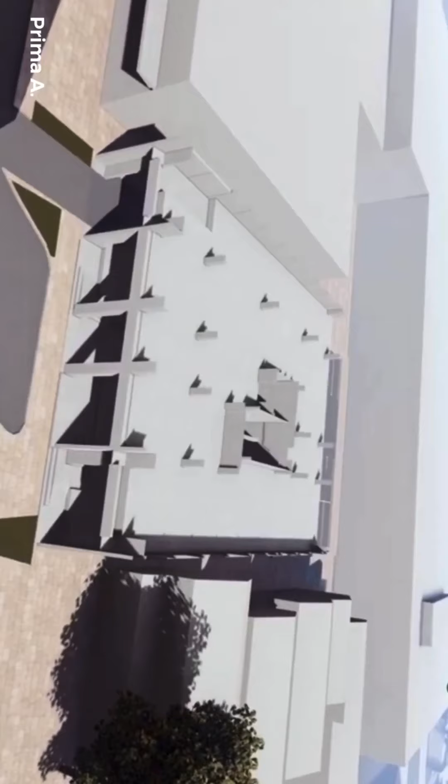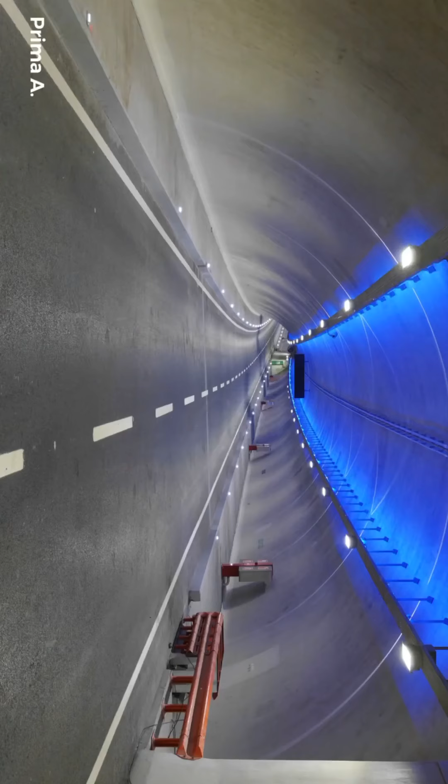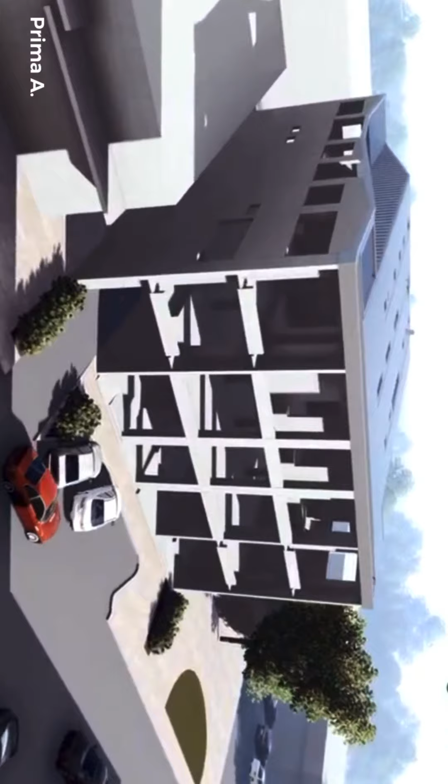Structural engineering is one branch of civil engineering that discusses the design structure and structure analysis of buildings. Structural engineering is also related to the development environment such as tunnels, offshores, bridges, flyovers, dams, towers, stadiums, and other civil engineering works. Further information, structural engineering theory is based on physical laws and empirical knowledge about the performance of structures based on certain materials and geometries.

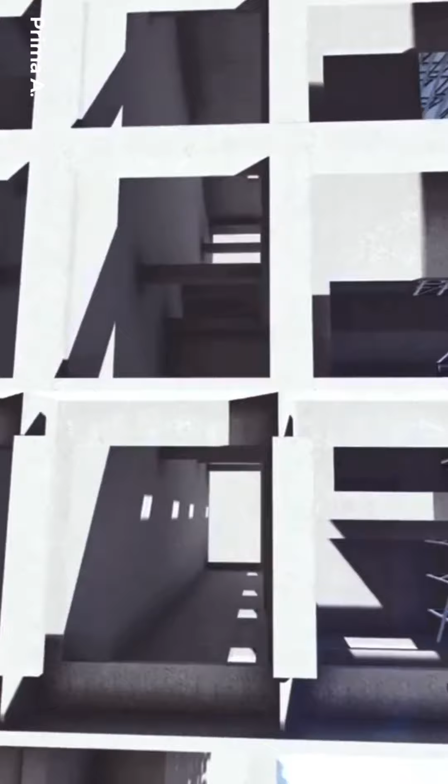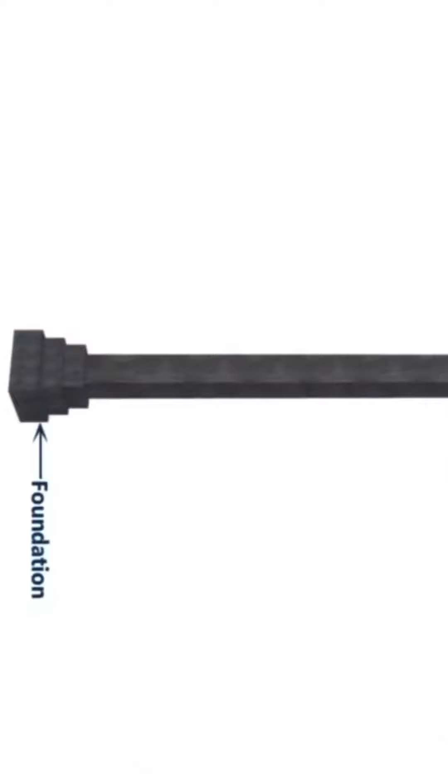Structure itself is defined as an interconnected system that is designed in a stable state and is used to support loads or load combinations in equilibrium under various external forces and internal forces. Materials are very important in structural engineering, where they have been used in every type of construction work. Common elements of building structures are beams, columns, slabs, walls, footings, stairs, and etc.

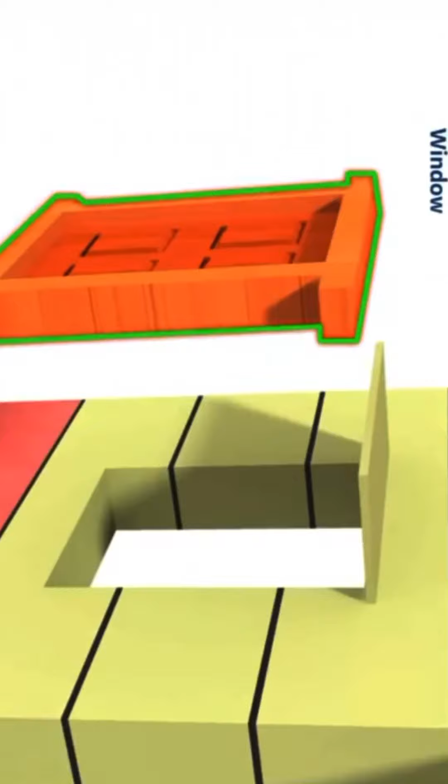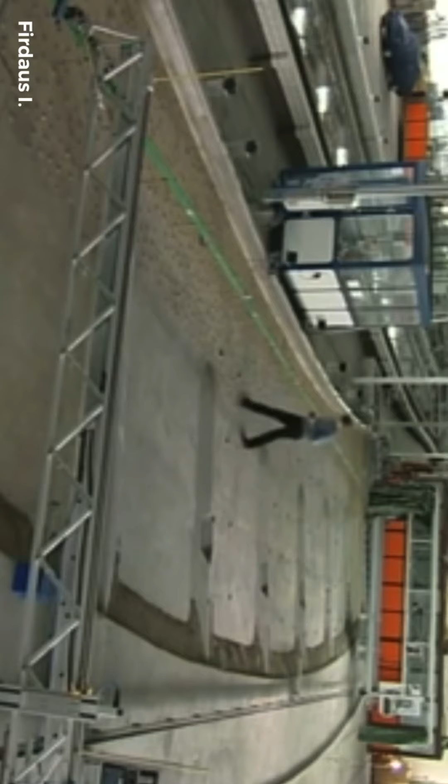Hydraulic engineering is a sub-discipline of civil engineering that is related to fluid flow, generally water and waste. One characteristic of this system is the extensive analysis of gravity as the driving force that causes fluid movement. This field of civil engineering is related to the design of bridges, dams, streets, canals, and embankments. Hydraulic engineering is also applied in the field of sanitation and environmental engineering.

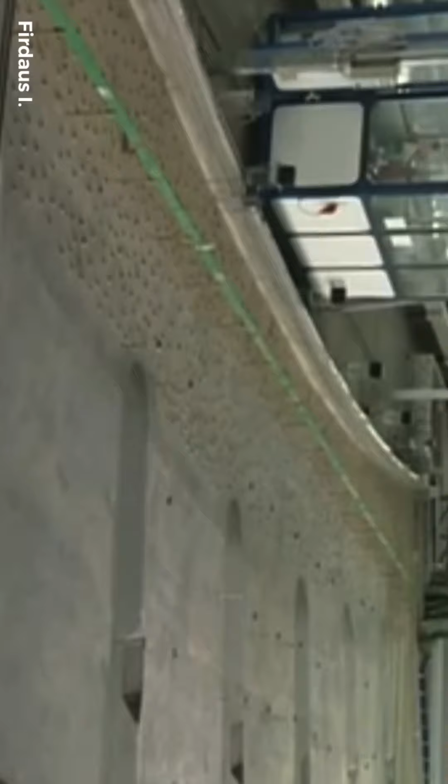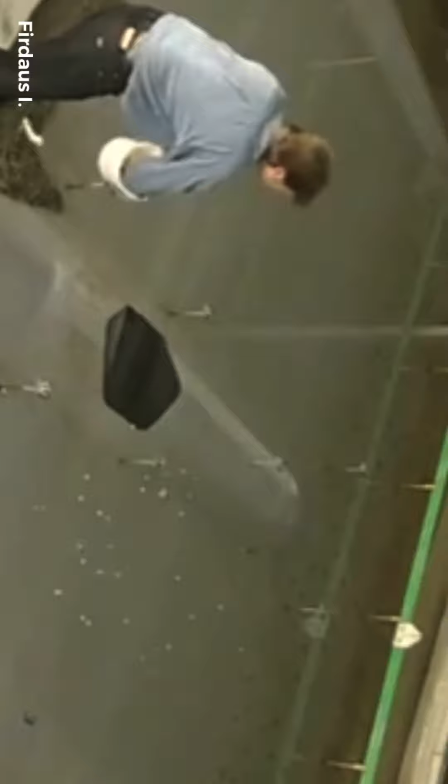Hydraulics is the application of the principles of fluid mechanics to problems related to the collection, storage, control, transfer, regulation, measurement, and use of water. Hydraulics is part of hydromechanics associated with water movement. Reviewed from flow mechanics, there are two streams that we learn: closed channel flow and open channel flow. These two kinds of stream in many ways have similarities but differ in one important provision.

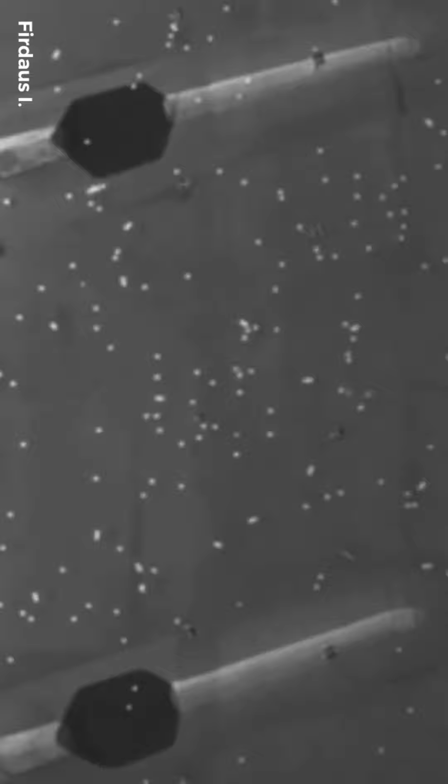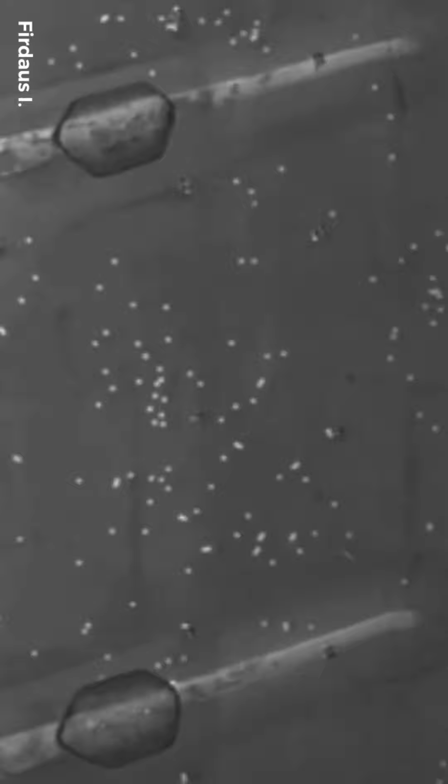As we know, water flows from upstream to downstream unless there is a force that causes flow in the opposite direction, until it reaches a certain water level elevation, for example, a certain water level in a lake or sea level. Also, channel planning is generally aimed at the characteristics of artificial channels. The hydraulic concept can also be applied equally well to natural channels as well as to artificial channels. If the channel is open to the atmosphere, then the flow is called an open channel flow or free surface flow. If the flow has a full cross section, it is called a closed channel flow or full flow.

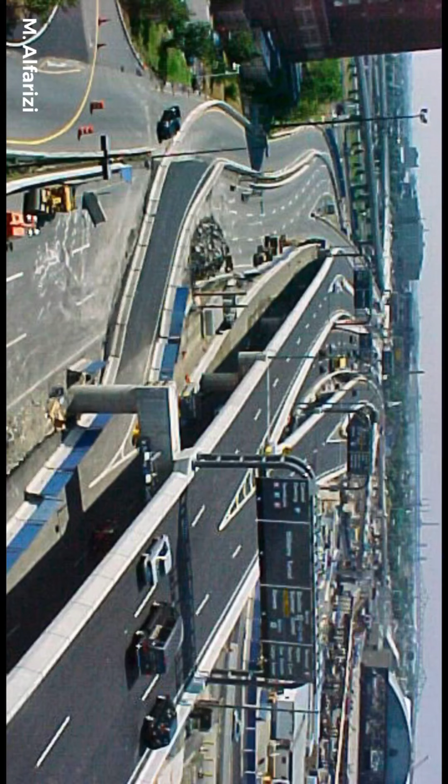Transportation engineering is a branch of civil engineering that is involved in the planning, design, operation, and maintenance of safe and efficient transportation systems. This system includes roadways, railways, waterways, and intermodal operations. Typically, the demand is the amount of traffic, like vehicles, rail cars, barges, that is expected to use a particular transportation facility, while the supply is the quantity and type of infrastructure components, pavements, and etc. The systems are typically large and expensive, to provide for the safe, efficient and convenient movement of people and goods.

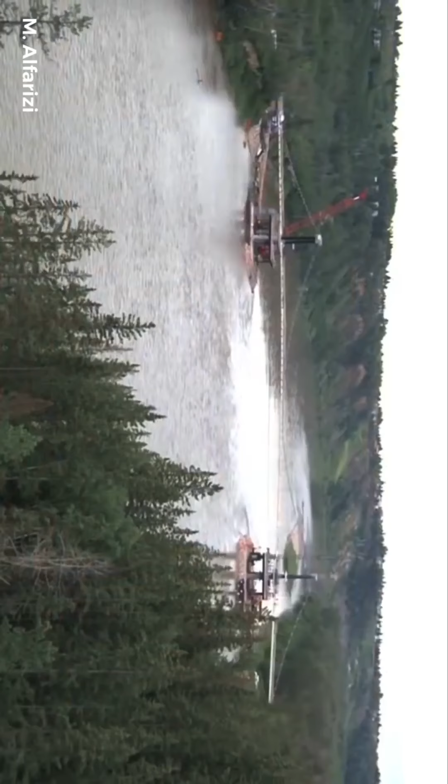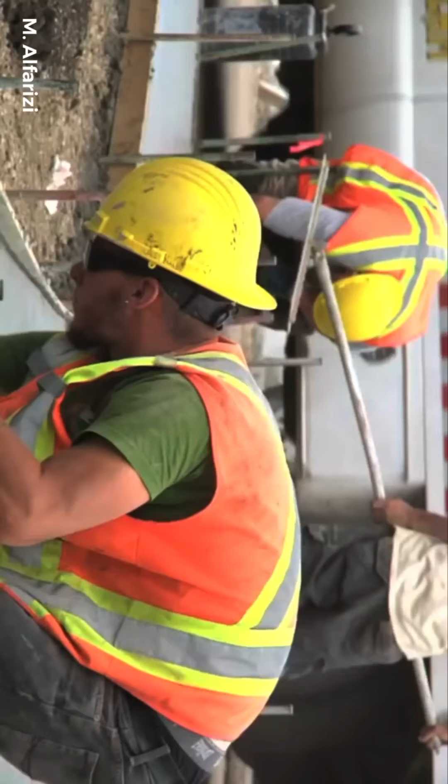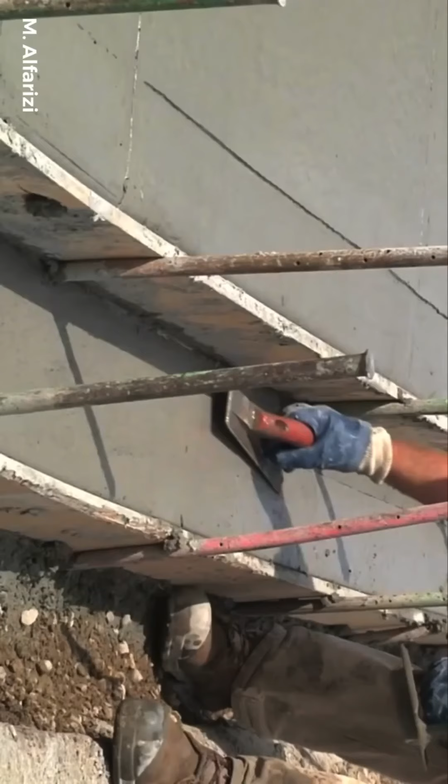Transportation has always played an essential role in the development of society, originally with regard to trade routes and harbors, but more recently with regard to land and air-based systems as well. Increasing environmental concerns have revived an interest in the development and management of public transportation systems. Professional activities can range from road and transit design and operation at the urban scale to railroad, seaway, and airport location, construction, and operation at the regional and national scale.

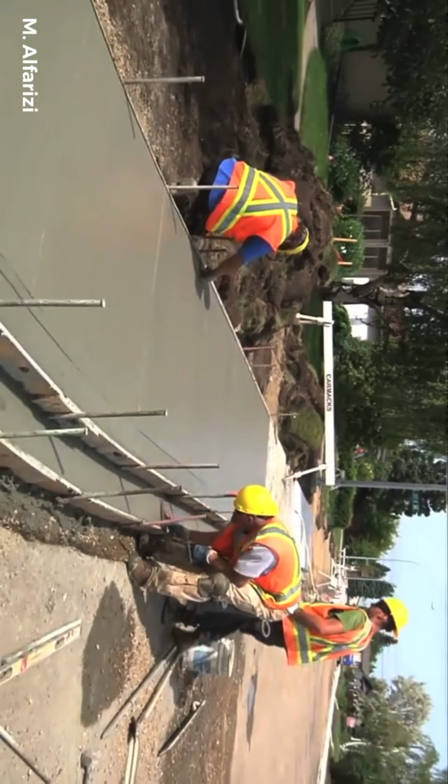Employment opportunities are available both in the public sector, for example federal and provincial government transportation ministries, regional and municipal road, traffic and transit agencies, and in the private sector, for example, engineering consultants, trucking, railroad, and airline companies.

The undergraduate, core, and technical complementary program provide for a solid grounding in transportation engineering sufficient for related professional employment.

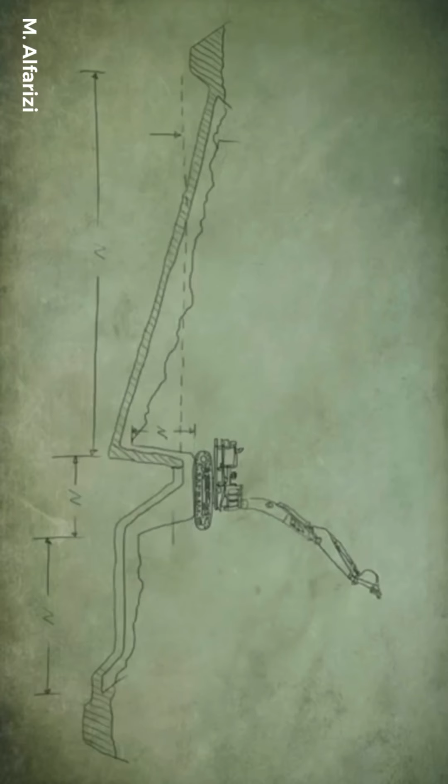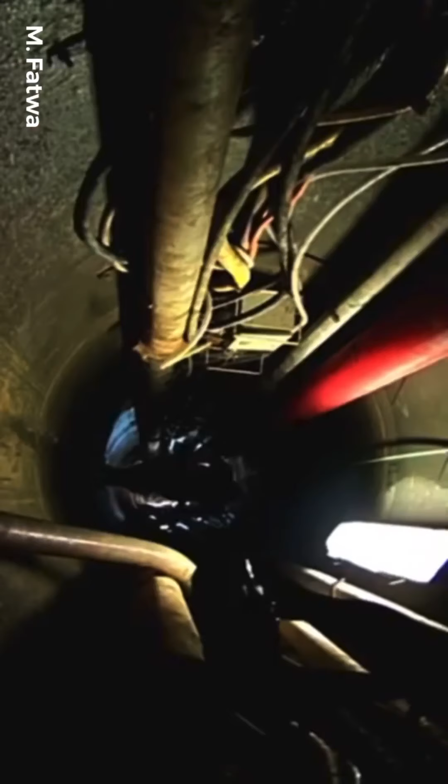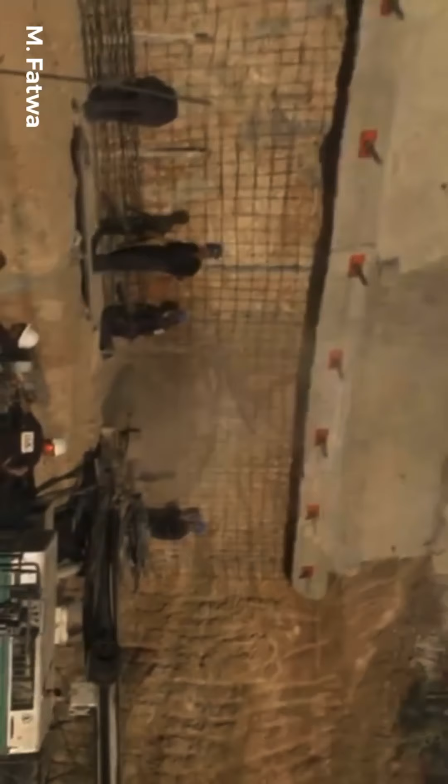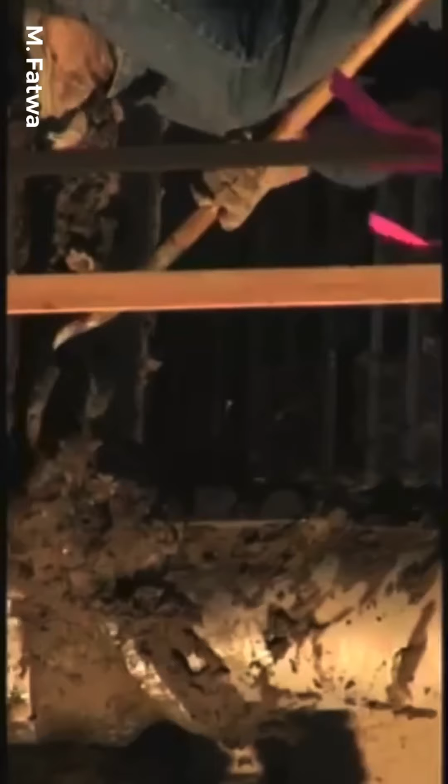Geotechnical engineering is a part of civil engineering discipline. With the engineering behavior of earth materials, this discipline is important in civil engineering. Its application in human needs such as military, mining, and petroleum, also the other engineering work that concerns with the construction occurring on the surface or within the ground.

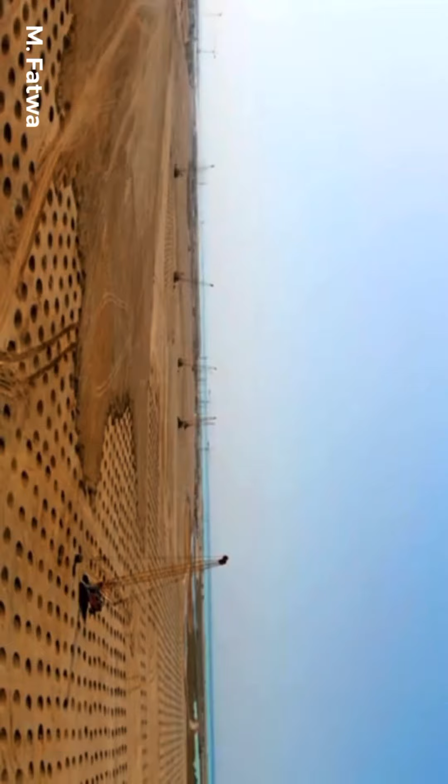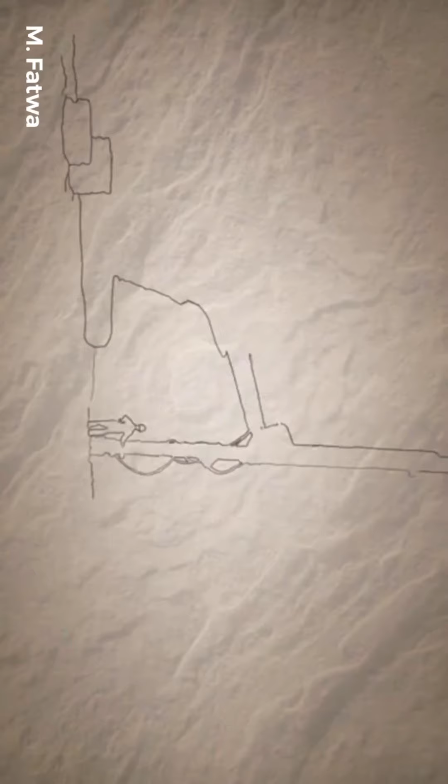Using the principles of soil mechanics and rock mechanics to investigate the subsurface conditions. Geotechnics uses scientific method, engineering principles, and use of knowledge of materials of the earth to find solution and design of engineering works.

And it's also applied science of predicting the behavior of the earth, materials, and process towards making the earth more suitable for human activities and development. Examples: predict and prevent natural hazards, such as avalanche, mud flows, landslide, rock slides, sinkholes, volcano eruption.

The natural environment encompasses all living and non-living things occurring naturally. This environment encompasses the interaction of all living species, climate, weather, and natural resources that affect human survival and economic activity.

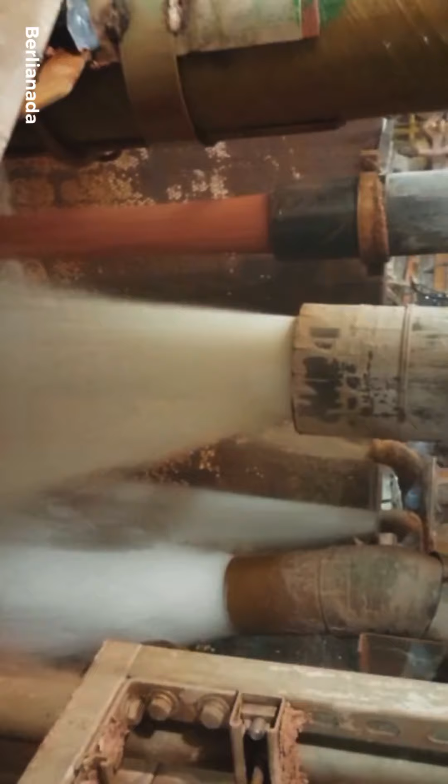Environmental engineering is a professional engineering discipline that takes from broad scientific topics like geology, hydraulics, hydrology, mathematics, and etc. to create solutions that will protect and also improve the health of living organisms and improve the quality of the environment. Environmental engineers devise solutions for wastewater management, water and air pollution control, recycling, waste disposal, and public health.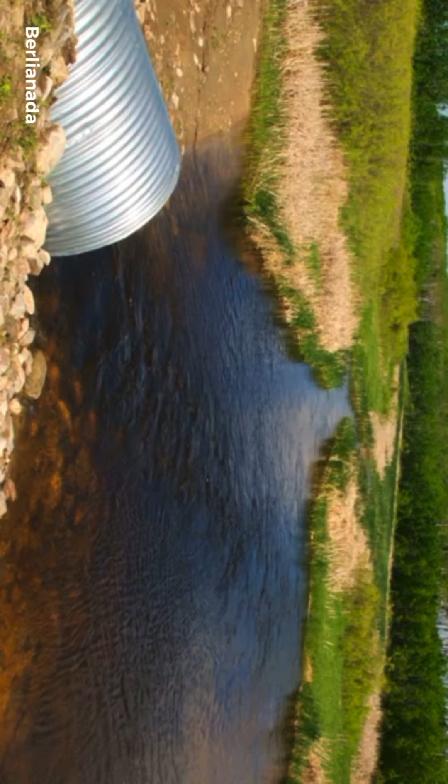They design municipal water supply and industrial wastewater treatment systems, and design plans to prevent waterborne disease and improve sanitation in urban, rural, and recreational areas. Environmental engineers study the effects of technological advance on the environment, addressing local and worldwide environmental issues such as acid rain, global warming, ozone depletion, water pollution, and air pollution from automobile exhaust and industrial source.

There are some applications on environmental engineering. The first is water supply treatment, second is wastewater treatment, and the third is air pollution management.

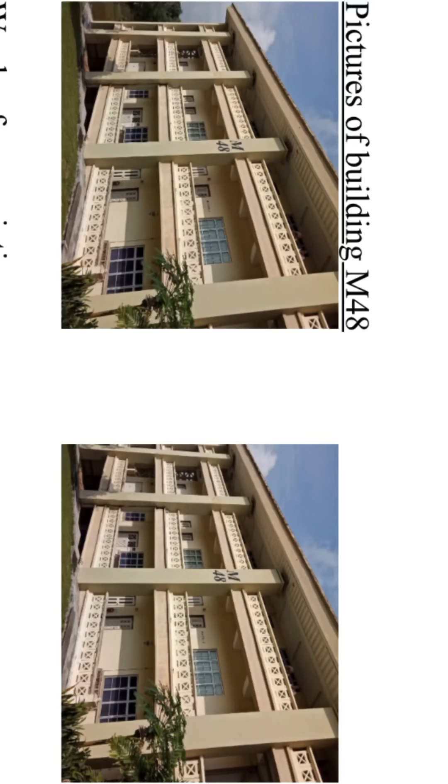The assignment was made by K2T22. They were interested to measure the M48 building that has 3 floors. They managed to get the requirement to measure with the help of measuring tape from Unit Ukur. Firstly, they tabulate the requirements to show the overall check structure in M48.

Column takes 2,655.2 kilonewtons, the 3 slabs 2,273.98 kilonewtons, and the total beams 645.02 kilonewtons. Then by the results, they have found the building dead load is 5,574.2 kilonewtons, and the live load is

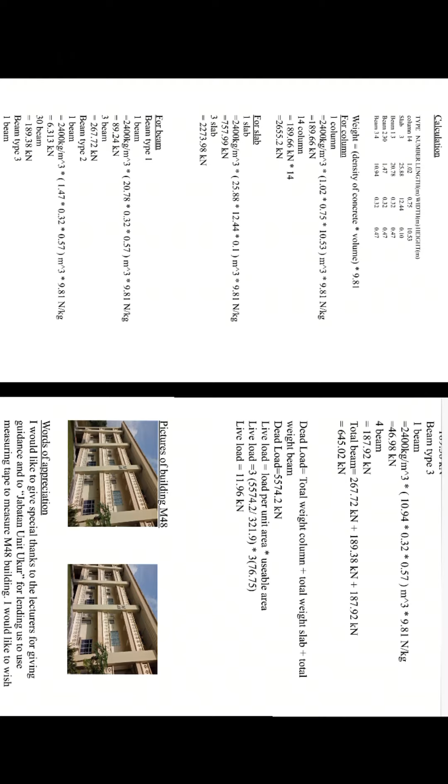11.96 kilonewtons. They also managed to make the water resource engineering assignment with a first look at coastal erosion and its mitigations. They describe the waterway resource routines as dredging, the process of removal of sediments and debris from the bottom of lakes, rivers, harbors, and other water bodies. The purpose of this research is to get the dredged material volume by the geospatial data.

Their survey was studied. Firstly, the dredges dredge the channel at the river mouth. Then, the dredged sand has to be transferred to the eroded part of the coast. After that, cover the moved sand along the coast by the geotextile with some smaller stone as its underlayer.

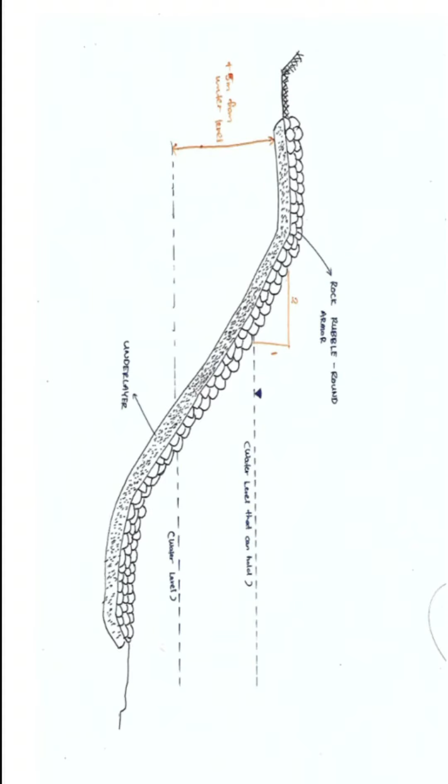Oh, it's done. The first assignment of K2 is about the nature of transportation and geotechnics department. I focus more on transportation, explain the role of civil engineering in transportation around the world in more detail. Our lecturer demonstrates the types of transportation and how they developed over years.

Our lecturer gave us an assignment: explain in your own ideas how to develop and improve the transportation system in SKAB, to summarize and assess our understanding. We discussed many solutions such as making a new bus stop, putting traffic lights, or making a wide sidewalk.

Engineering is different than other programs on campus, because our lecturer gave us the opportunity to learn the importance of making real environment solutions and how we should pay more attention to the environment around us. He demonstrated the role of civil engineering in the environment and how the civil engineer could help to save it.

He talked about some environmental issues that threaten the world, especially Malaysia, without forgetting the water section in this department. He explained how water can be crucial for the civil engineer in his work, from foundations of buildings to managing water supply and wastewater as well, with an example of a river in Malaysia.